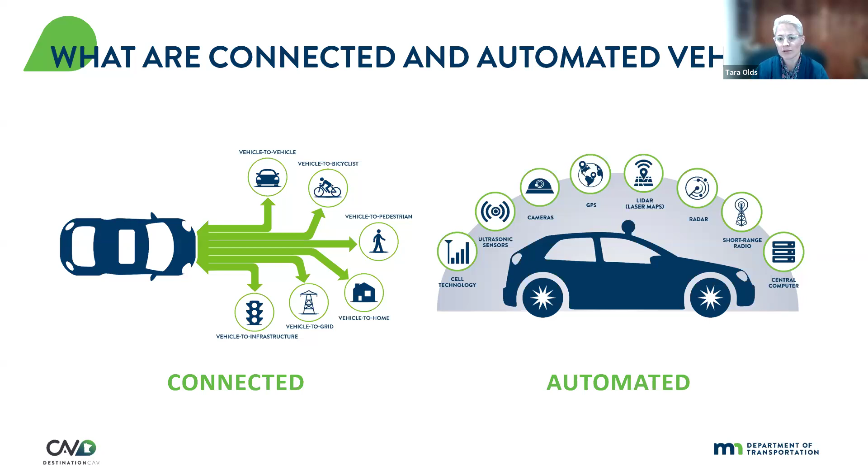We had a previous strategic plan that had 65 recommendations, 9 different focus areas. And quite frankly, we recognize that it was a little broad, and as we've learned over the last 5 years with work we've done, both in research as well as testing of infrastructure, and seeing where technology has continued to advance and the direction maybe has changed, we can be a little more focused about recognizing where the real benefit is for our state, for our citizens, and that we have the opportunity to make substantial investments and advancements in the industry.

So we're really excited to continue working on this. Like I mentioned, we're still kind of in the development phase of the new plan. So these are draft and they may end up changing, but under each of these we'll have some key specific works that we'll be focusing on as well, that we'll be excited to share over the next year.

And then lastly, before I dive into a little bit about some of our projects, which Nicole will again give more detail about with regards to safety, we have Minnesota CAV guiding principles.

I think these are really helpful to sometimes share to a broad audience, to recognize that when we look at the role of connected and automated vehicles and the way it can potentially transform our transportation system, we see a lot of opportunity, like I said before: safety, accessibility, and equity, and we could probably list a number of other things as well. But we also recognize that we have a lot of opportunity to dive into different things, and things are constantly changing. So how can we be strategic about that?

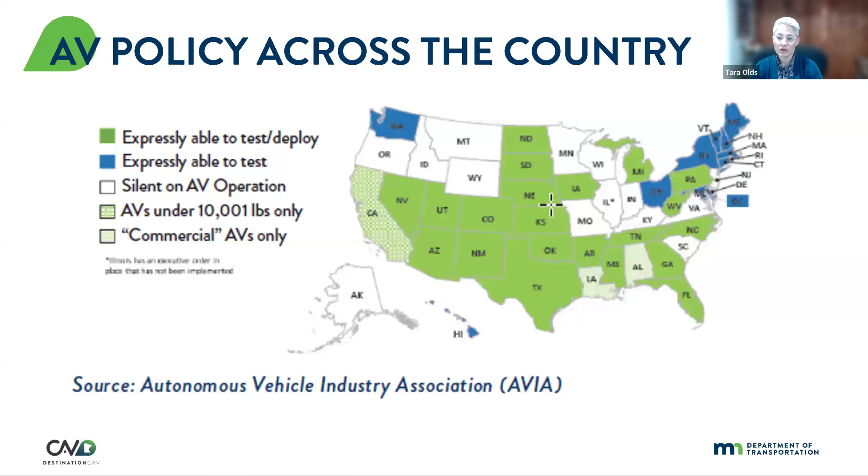We're looking at different things within Minnesota that we think are important to help us determine what Minnesota wants to achieve when it comes to future automation and the potential of AVs on our roads. So we're working through a policy analysis project - not actually drafting policy, but preparing recommendations and being prepared should policy be proposed perhaps in the next year. We're looking at what the AV industry is looking for, where Minnesota wants to see the risk fall, how we look at self-certification since there's no formal certification or process from the federal government to date, and what's the pace of innovation and growth, and what are the needs here in Minnesota.

What are potential legal challenges that we can be prepared for and try to avoid? And then the last one, I think that's really important, is where does safety lie and who's responsible for that at the end of the day?

So before I hand it over to Nicole and let her present on her research, I just had a couple questions that I wanted to pose to the audience to think about.

Things that I often think about in the work that we're doing is: what is government's role in advancement of automated vehicles? I think often people will think the work that my team is doing is to try to make AVs come here faster, or for us to convince the public that automated vehicles are the best thing. And I'm personally not an advocate of that.

I think our role is to make sure that as technology and changes occur, we're making sure that people are benefiting from them the most and that we're actually meeting the needs of the people. I think it's a question of what our role is in the management of automated vehicles and the way that it changes our system.

And then another one: is better for some, but not better for all, still better? I think this might be a question we can ask as we start to see if people in vehicles might be more safe from technology, but people outside of vehicles are less safe. That leads me to the question of what if disparities of safety or other things increase even when we still have advancements overall. Not necessarily a popular question to pose to folks, and it gets a little bit of stares—there's not a right way to answer it either, but I think it's a fun one to ponder.

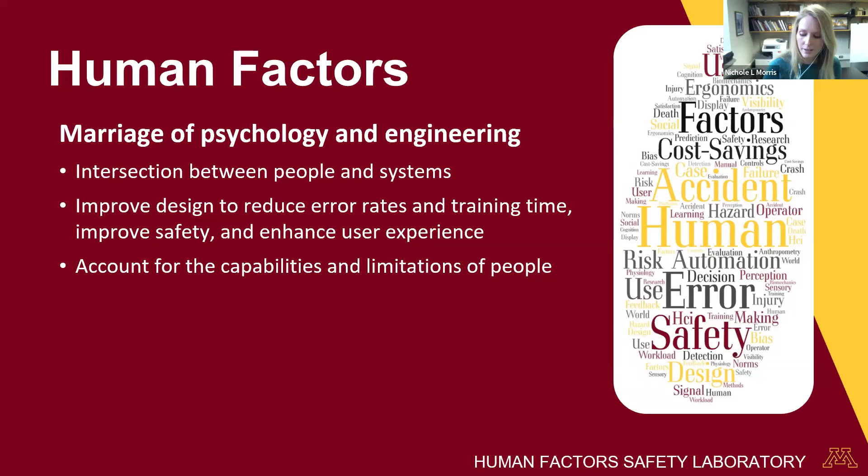So how are people interacting with systems? We can design really amazing, beautiful technological systems, but if we haven't really accounted for how people will use them, what kind of error might they have—we may be mitigating one type of error but introducing a new type of error with a system. So we're really looking at improving safety, enhancing the user experience, making things really fluid and smooth, again, by taking what we know about the capabilities and limitations of people.

So with the MedCity Mover, this was just such a great project, and really, I think one of my lab's most successful projects to date. I'm really proud to talk about the good work that we did.

As Tara mentioned, they had this deployment of the MedCity Mover, this low-speed autonomous vehicle. I often like to bury the lead on just how slow we're talking when we say low speed, but Tara already gave away the good stuff, that this thing was going very, very slowly. We're talking around 10 miles an hour, so very slow. And this was in downtown Rochester.

We had some conversations leading up to this deployment about what might happen, about how drivers of manual vehicles would interact with these autonomous vehicles, particularly those they know to be autonomous. Will their overtaking behaviors change? Will their following distances change, depending on their trust and risky engagement around them?

Thankfully, we had those conversations already going, and my team is often engaged in a lot of field work around pedestrian safety. So crossing intersections, looking at how drivers are interacting with one another as they're yielding to a pedestrian in a crosswalk.

So all the stars really aligned for us when this deployment happened, and they were identifying that there was indeed some risky overtaking occurring near the MedCity Mover. And like Tara mentioned, some obscene gestures or really unkind types of interactions between drivers of the manual vehicles and the shuttle, or the folks on board the shuttle.

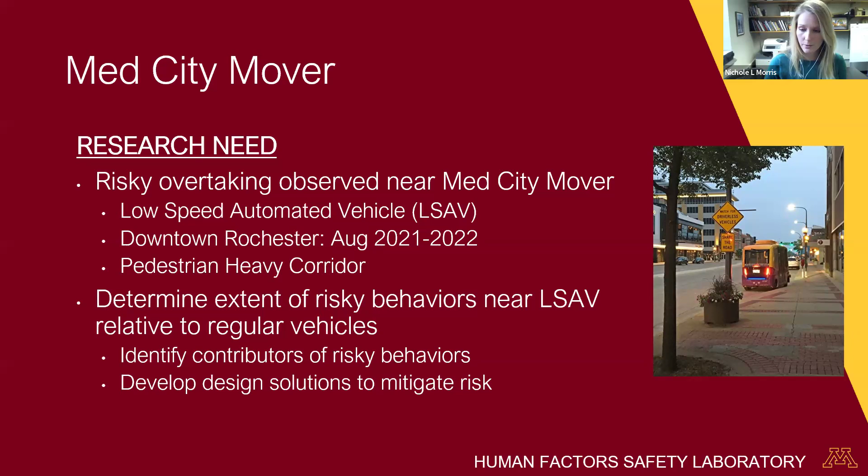So I'm going to talk about our research process. Typically when we're doing a human factors study, that kind of adage is early and often. So when you're doing human factors work, you really want to be involved at the ground floor of the design, at the beginning of ideation and prototyping, and you work your way from the lab to the field. That's really the optimal path typically to avoid some issues.

But often, as in this case, we get brought in very late. So rather than beginning in the simulation lab or in the lab and working our way to the field, we had to begin in the field. This thing was already deployed, it was already built. And so it really changed the process that we needed to take. We really went in the reverse order of what we would typically do, starting in the field, and we worked our way through all of these different phases.

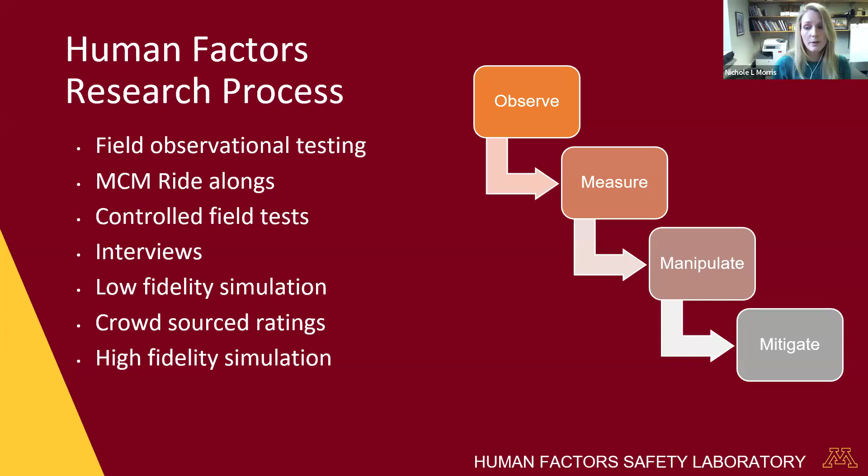So I'm going to talk about nearly all of these, with the exception—I'm not going to dive too much into the interviews with the operators of the shuttle, but that was highly illuminating and helped our process. But really I'll talk about what we learned in the field, and then how we started taking what we had observed to actually measure the risk, try to come up with ways to manipulate what people are doing, and determine whether we're able to actually mitigate those risky driving behaviors.

So we had 3 main data collection methods in the field. First we were doing stage crossings at the unsignalized sites, then looking at turning vehicle observations at the signalized sites, and we also did onboard observations along the route.

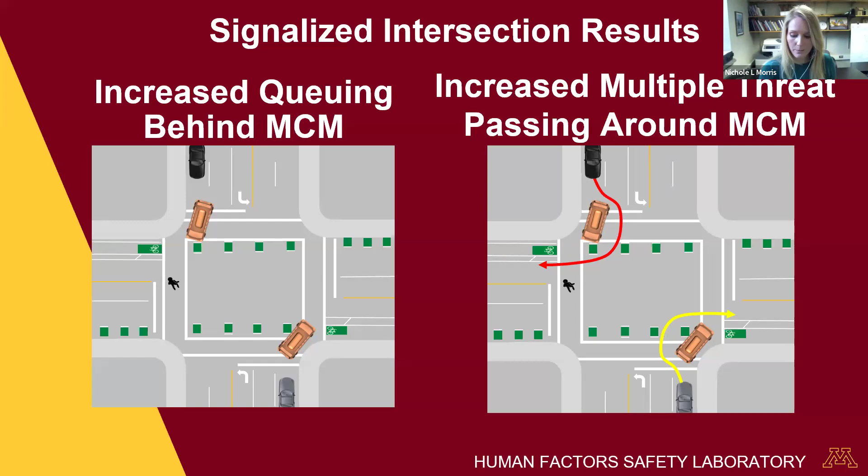And then we saw that the MedCity Mover was also 36.4 times more likely to be overtaken by other vehicles while yielding to a pedestrian at a signalized crosswalk. So we saw a lot of this overtaking behavior at the signalized crosswalk. Sometimes the pedestrian was in the crosswalk, sometimes not. Often the pedestrian had already cleared the crosswalk, but it took some time for that MedCity Mover to get up and go. So we saw a tremendous amount of increased risk, again, that we would attribute to that queuing. It's not completely mediating that risk, but it is a partial mediator of risk with that queuing.

So next we did our ride-alongs. We wanted to see more continuous interactions. We really only had so much data that we could deal with when we were at the corners observing that overtaking, and as Tara mentioned, this was problematic.

There was often supposed to be 2 MedCity Movers in operation, so that would double our data collection, but very frequently one would be down. So we would only have one, and we'd kind of have to wait around every time it would come through. It'd take quite some time for it to make its loop. So the ride-along with the MedCity Mover gave us an opportunity to look at other types of overtaking behaviors rather than just at those signals at the turn.

So we did this where we would ride along the MedCity Mover. Each day we had data collection, we would do an onboard data collection session. We would ride along for 2 loops, observing the overtaking behavior, and then we would drive a research vehicle along the route in 2 loops. The research vehicle would go exactly the speed limit, so it was obviously going faster, but we did not go right on red. That was one behavior we did try to match across the 2.

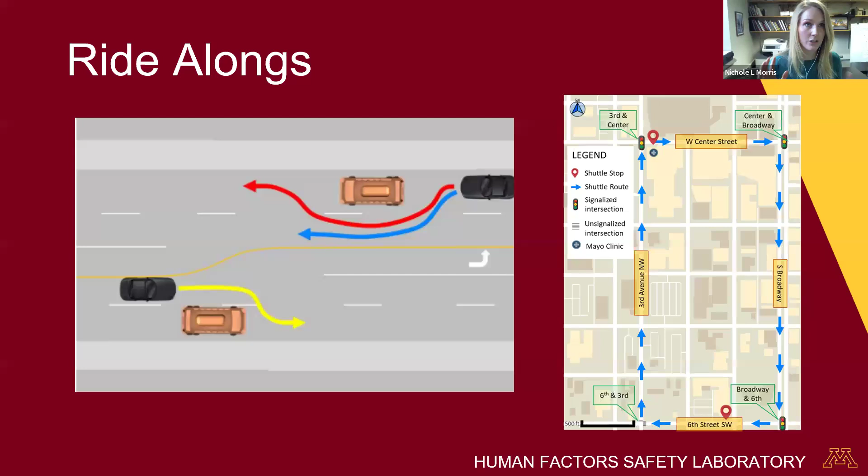We're also looking for yielding and multiple threat passing along those routes as well, if we had the chance to see the MedCity Mover yielding to a pedestrian and the research vehicle.

We certainly saw an increase in risky overtaking of the MedCity Mover. The cutoff from behind, we solely saw that on the MedCity Mover - we didn't observe that in any of the loops with the research vehicle. And then cut off from the far lane and change lanes from behind, again, we saw a big risk.

This was 13.6 times more likely to be cut off via lane change, so you see a lot of risk. Now you may be thinking these are ticky-tack things and people change lanes all the time, but these weren't just lane changes. These were really cutting in very closely to the MedCity Mover.

The reason this is really problematic for the MedCity Mover is if you got too close into those bubbles that Tara was talking about, it would engage a hard braking maneuver. This is a big reason why it really can't go much faster than 10 miles an hour. These hard brakes were pretty intense for the riders on board, so if someone cut off, got into one of those bubbles, and the MedCity Mover engaged in a hard brake, it would be a very rough ride for the passengers on board.

There was one incident of someone cutting off the shuttle, it braked, and had a minor collision with the MedCity Mover. So we certainly don't want these types of behaviors occurring. It just increases risk of rear end crashes, sideswipe crashes, and angle crashes.

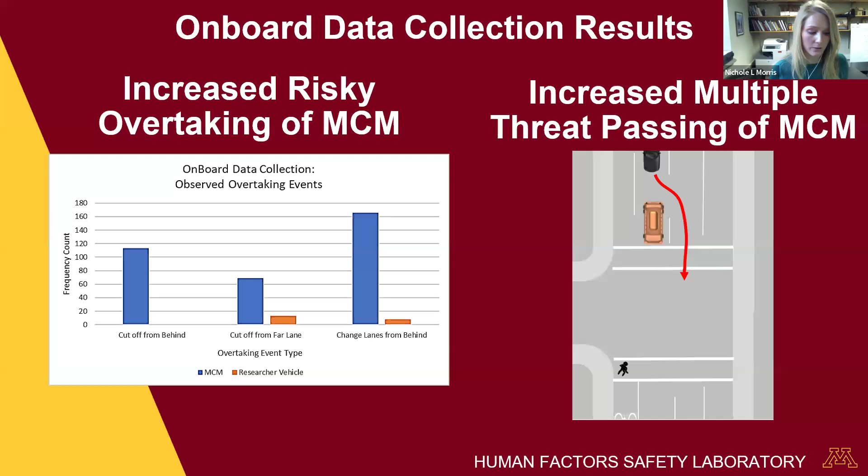We also saw an increased risk of multiple threats. This is a diagram of one of the crosswalks along the route, an unsignalized crosswalk. We saw that there were multiple threat passes when the MedCity Mover was yielding to a pedestrian at this crosswalk. We never once saw a multiple threat pass when the research vehicle was yielding to a pedestrian in this way.

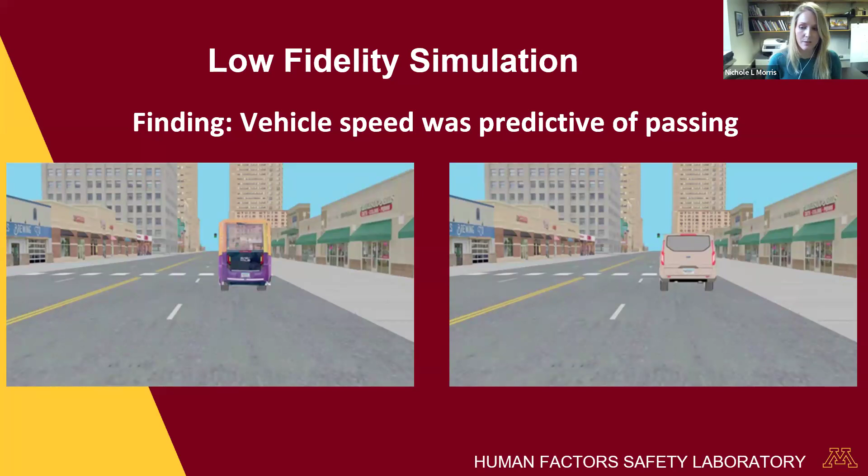We looked at a number of different types of signals, showing the shuttle at different places along the route. We wanted people to say what they thought was happening, what the shuttle was doing, and whether they would overtake. It was pretty simple how we presented this.

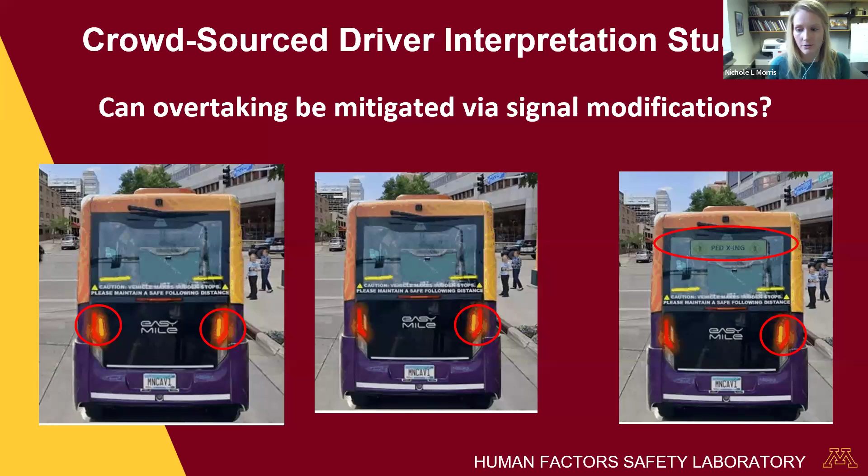Looking at people's decision to overtake when presented with the short video of the double flashing hazard, we saw much more frequency of people saying they would overtake than in the other conditions—just the turn signal on, or the pedestrian Xing or pedestrian crossing, where it was really decreased. We also found that if they thought the vehicle was yielding to a pedestrian, their likelihood of saying they'd overtake went down.

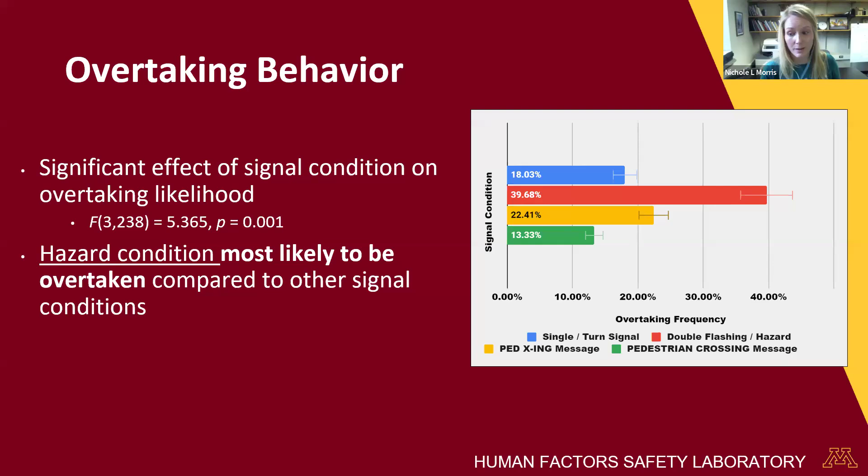We also looked at their response time—how long it took before they made their selection—trying to get at the cognitive process: is it more confusing, requiring them to really think about what it's doing, versus being very intuitive? We found that with the hazard condition, the response time was quite slow.

In the last iteration, we took all our work and pulled it into our high fidelity simulator. This isn't an image of the MedCity Mover simulation, just one of my favorite pictures of the sim, so I used it. This shows the Human Factors Safety Lab simulator—a full vehicle chassis that moves, with an arc screen that wraps around, and Peter builds these beautiful custom worlds for us.

We created a number of different scenarios forcing interactions between participants in the study and the MedCity Mover. We capitalized on what we often saw in Rochester—there was a lot of road construction that summer, and frequently the roadway would be reduced to one lane due to construction closing off a lane. That helped us create a more forced interaction where they really had to follow the shuttle, and it was highly valid because that's really what was happening in Rochester.

You can see the yellow marked off sections, representing where barrels would be. We could force some of these interactions where they'd be forced to follow the shuttle, but then it would open up and give them the opportunity to overtake if they chose, as well as opportunities to yield to pedestrians at unsignalized crosswalks, or at signalized crosswalks during a right-hand turn.

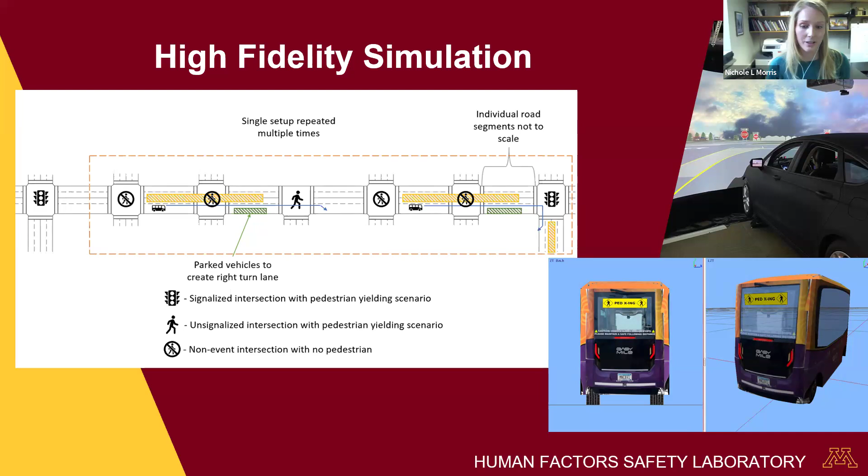We also had a double flashing hazard condition and a single turn signal condition to see if we could, one, validate that we observe the same types of overtaking behaviors in the simulation that we saw down in Rochester, but also whether we could mitigate that overtaking behavior when we present the PED-Xing or pedestrian crossing text icon condition to give people insight under the hood of what the automation is doing.

We found that participants were significantly less likely to overtake the MedCity mover in the text icon signaling condition relative to the hazard flashing condition. The text icon signaling condition more clearly represented a turning vehicle, so people could really interpret and tell us afterward they knew what it was doing. The behavior we saw in the simulation wasn't quite as extreme as it was in the real world.

When people come into our simulation lab, they usually want to show they're good drivers and do a good job, and they're less likely to engage in some of that risky behavior that we see in the real world, where people are very motivated to speed and get home. When they come into our lab, they certainly just want to do a good job.

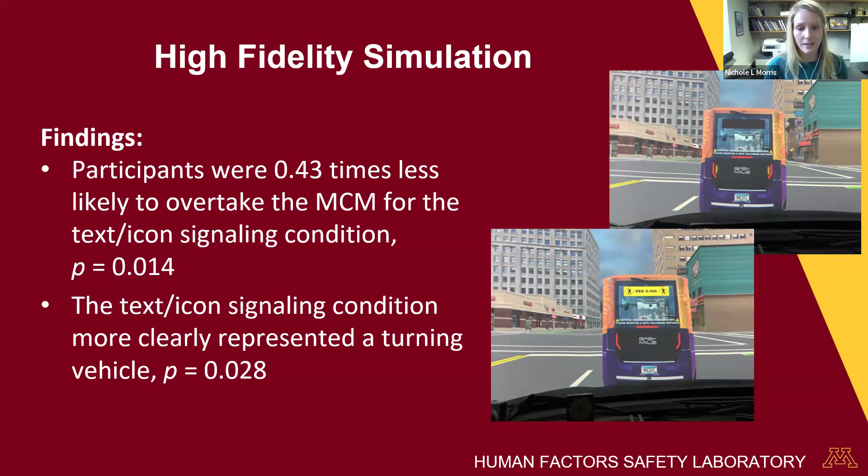The fact that we still observed some of this confusion and overtaking behavior, and were able to mitigate it in the driving simulation, shows to me that we have tremendous potential to mitigate these risks in the real world by implementing something like this, where the automation really works to communicate with drivers behind it, to tell them what it's doing. Why am I stopped? Am I loading passengers, or broken down? No, I'm stopping because I'm yielding to a pedestrian. I think there's tremendous value in this finding.

So to nearly wrap up, I always like to include a bit of an academic quote here, and this is one of my favorites. I think it's really important as we think about how automation works in terms of achieving our safety goals.

Often when we think about traffic safety, we hearken to these stats of 94% of our fatalities coming from human error, human behavior. And so we often think the solution is just to remove humans from the equation altogether, that if we can just automate our way out of this problem, we will achieve our safety goals.

But the thing to always remember is this quote, from the late great Parasuraman and his colleagues: automation does not merely supplant human activity, but changes the nature of the work that humans do, often in ways that are unintended and unanticipated by the designers of automation.

So if you think back to my beginning point, human factors really works best if it's early and often. But so frequently these companies are racing to be at the front of the line to release this technology and get it out into the field, without really being thoughtful about employing human-centered design, being careful and diligent to see how people will interact with this technology and how it will change the way humans interact.